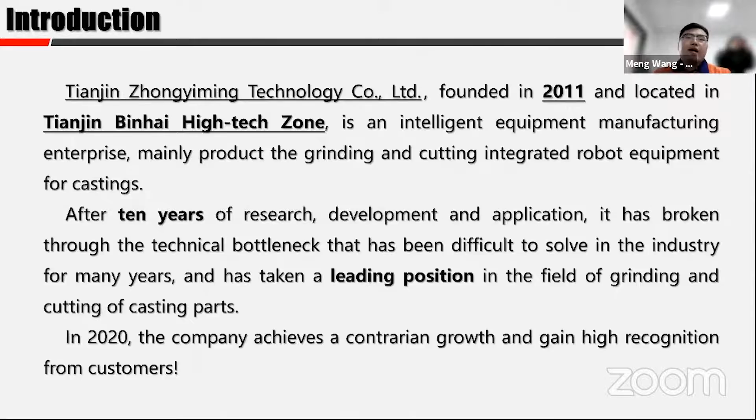I'm a mechanical engineer, mainly engaged in mechanism synthesis and industrial robot design. Okay, let's get back to business. My presentation is composed of 5 parts. The first one is challenges.

Manufacturing is the foundation of a country, and the manufacture of parts directly determines the function and performance of the equipment. Casting, as one of the most important methods in manufacturing, accounts for more than 40%. With the development of automobiles, rails, wind power, and other fields, the size of castings has gradually increased, reaching several meters to tens of meters.

At the same time, due to the requirements of equipment performance, the materials of castings have also increased. Among them, the most typical are high hardness, high viscosity, high temperature resistance castings, such as high manganese steel, high chromium steel, high nickel steel, and so on. In a word, nowadays, castings are developing in the direction of multi-types, multiple materials, and multiple scales, and the machining difficulty is also increasing.

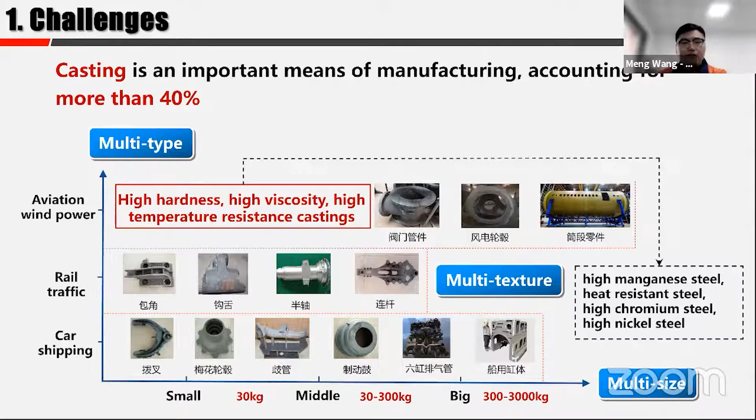As we know, the casting process generally has tens to hundreds of millimeter casting heads, mold closing lines, and other residual features. Their efficient removal is a key technology problem in casting parts manufacturing because it affects the production cycle to a large extent.

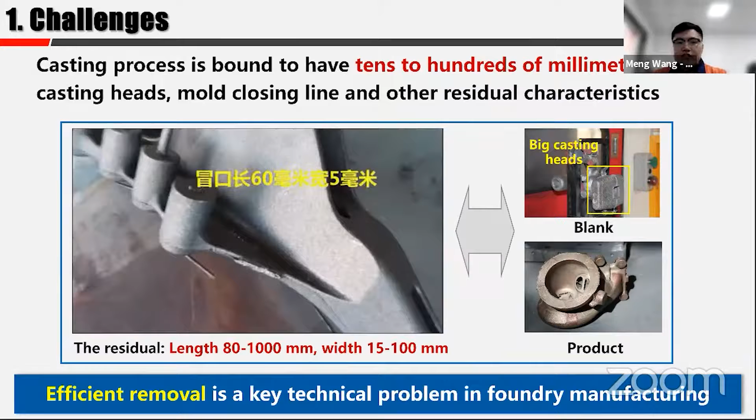Unfortunately, at present, more than 90% of enterprises use manual grinding methods, which is not only low efficiency, but also poor consistency and severe pollution. In contrast, the use of automation equipment or robots for casting machining is more efficient, green, and cost-effective. Therefore, the way that machines replace people must be the development trend of the future.

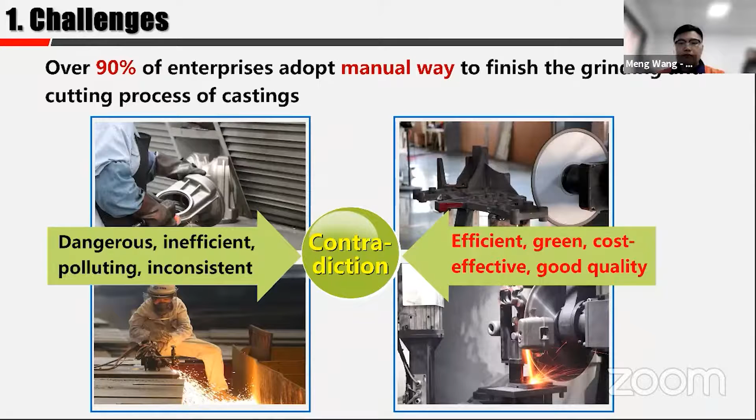Based on this, many countries around the world have carried out a lot of exploration and practice. The current solutions mainly fall into the following two categories. The first one is machine tool equipment, which is modified from traditional machine tools. It has high stiffness and precision, and could complete the grinding and cutting of large-size residual features. However, due to its poor flexibility, it can only complete machining in a small space and limited direction. Meanwhile, it is easily affected by serious dust during processing, so its maintenance cost is very high.

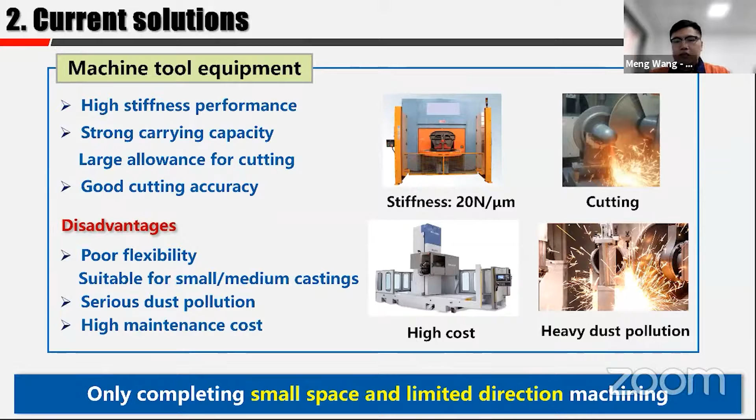The second type is serial robot equipment. Although it has high flexibility and low cost, because of its poor stiffness, it can only finish small residue and low efficiency grinding. Obviously, the above two types of equipment are not ideal choices in terms of cost performance and processing efficiency.

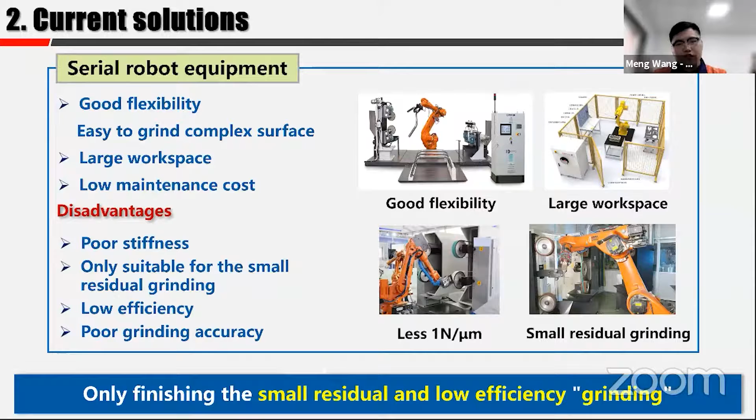For this situation, our company has given a brand new scheme. Our idea is to combine the high flexibility of serial robots and high stiffness of machine tools, adopting a new hybrid mechanism as a breakthrough point for innovation, and form a novel generation of grinding and cutting integrated robots with high stiffness. Furthermore, by studying performance design approaches and control technologies, we can make up for the existing deficiencies.

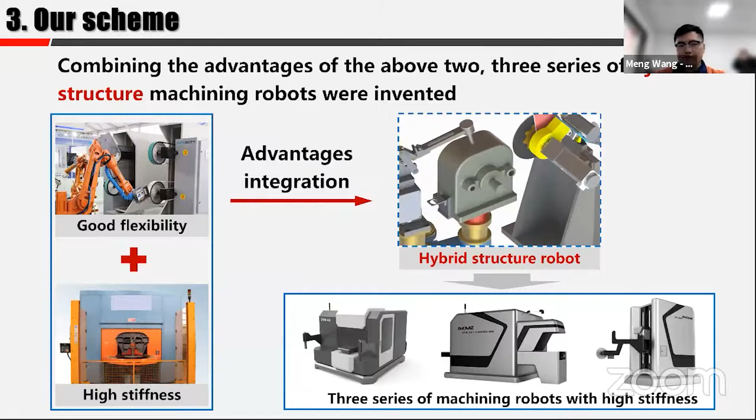Based on that, we invented 3 series of intelligent robot equipment. After that, integrating other auxiliary technologies such as force control, teleoperation, and feature detection, a total of 10 versions of robots and production lines have been developed to meet the machining demands of different castings.

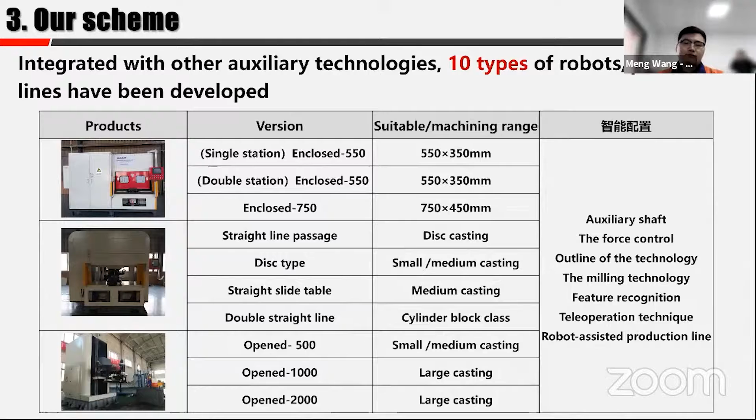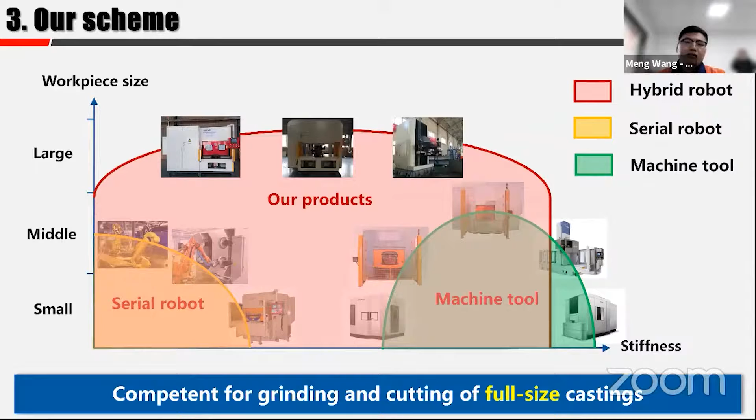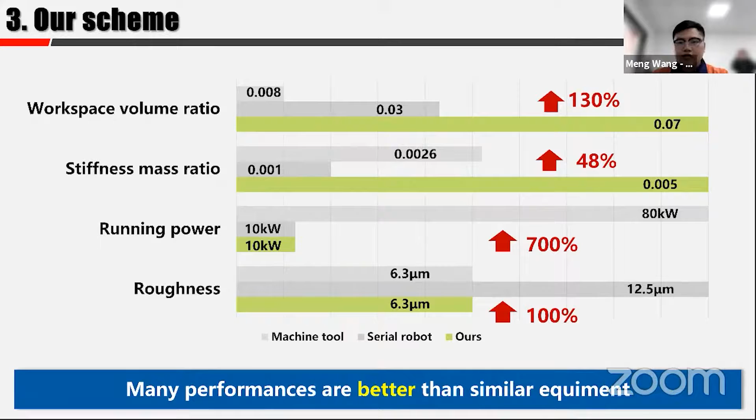In terms of applicability, our products have high rigidity and are suitable for grinding and cutting of full-size castings. To be more specific, the workspace volume ratio, stiffness mass ratio, running power, and machining quality are superior to other similar equipment.

In summary, due to using the novel hybrid structure, our robot has high stiffness, good flexibility performance, and can realize the integrated machining of grinding and cutting. Among them, there are 4 most important advantages: all residual features are removed at one time, small size and low energy consumption, saving space, time, workers, and expenses, and high comprehensive benefit ratio. Okay, that's all the introduction about our scheme.

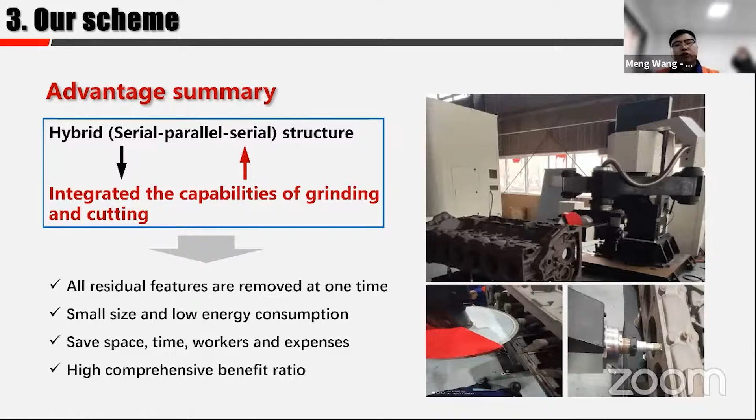The next part is applications. Since the establishment of our company, we have close to 30 customers and sold more than 150 sets of robots or production lines. From the sales network diagram, it's clear that our partners are basically in mainland China. However, we very much hope to enter the international market and cooperate with demanders in other countries.

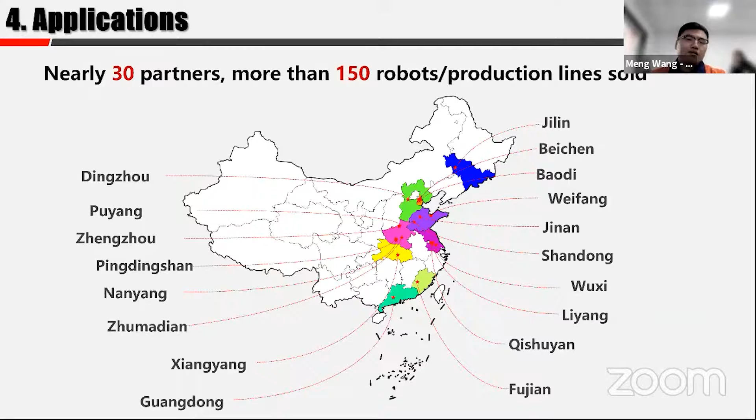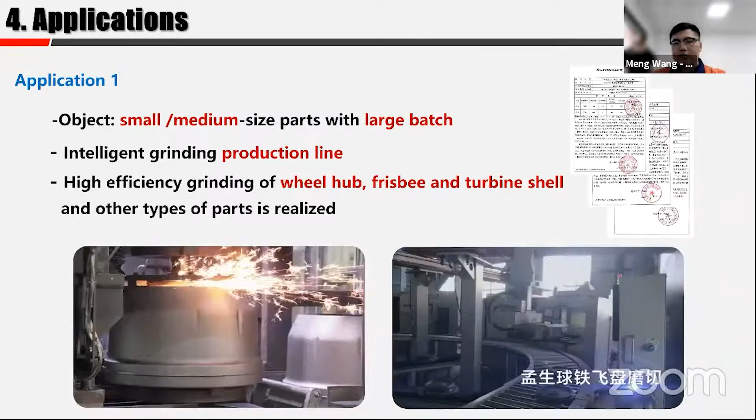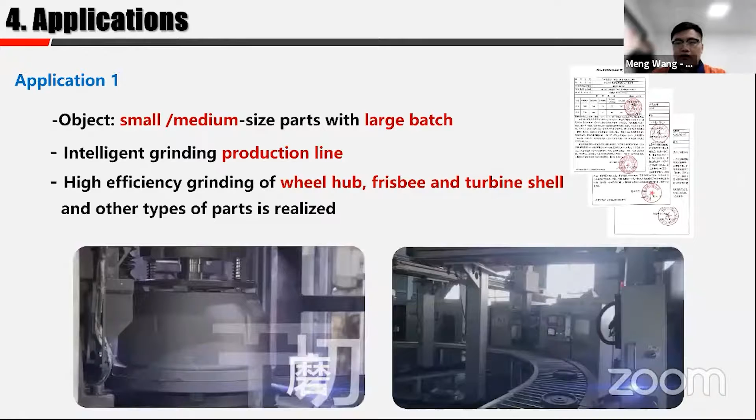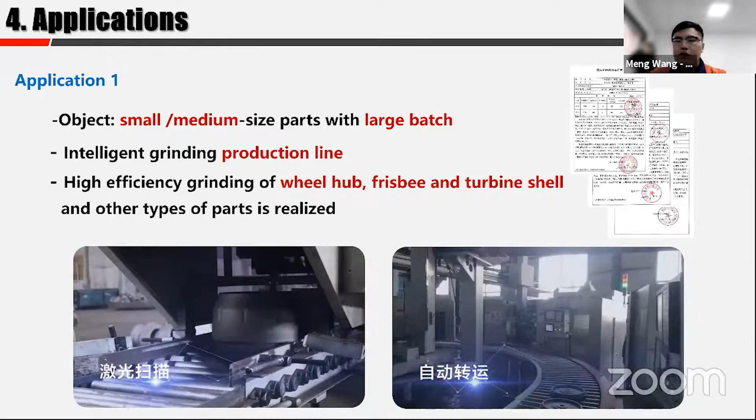According to characteristics of the objects, we divide all applications into three categories. The first object is small or medium-sized casts with large batch, such as wheel hub, frisbee, turbine shell, and other types. For that, we adopt the intelligent production line to solve the problem of high efficiency machining of such castings, which has been applied in many enterprises.

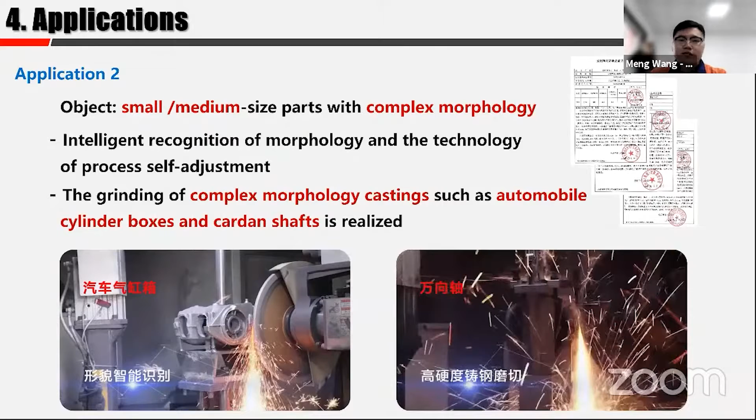The second type of object is small or medium-sized castings with complex shapes, mainly automobile cylinder boxes and cardan shafts. To deal with that, we draw on the method of intelligent recognition of morphology and the technology of process self-adjustment.

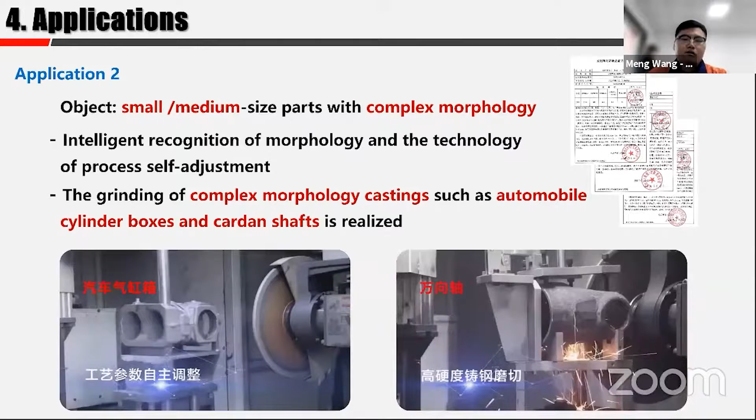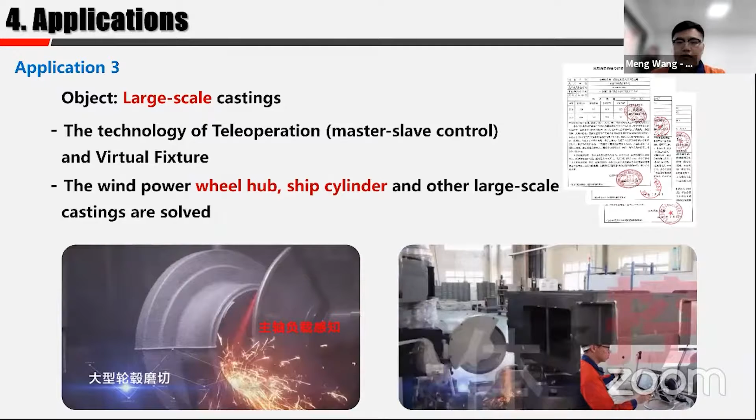The third category is the large-scale castings. Due to the small batch, large size, and random distribution of burrs, this type of part has always been a worldwide technology problem. The plan adopted by our company is to integrate teleoperation based on master-slave control, virtual fixture, and spindle load detection technologies to deal with that. As shown in the video above, we have carried out a lot of experiments, and the results show that the method is useful and the effect is very good.

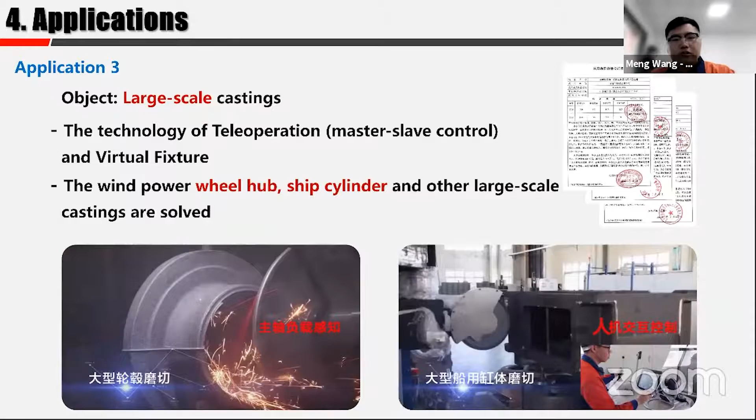In addition, an application requiring special introduction is the four-cylinder internal combustion engine. The cylinder block castings have large size, wide and thin casting heads, and complex holes and grooves, which leads to very difficult machining. To solve this problem, we divide the machining process into 6 steps. The opened 2000 high stiffness robots with 3 tools were used. Compared to the traditional processing method, the efficiency is increased by about 10 times.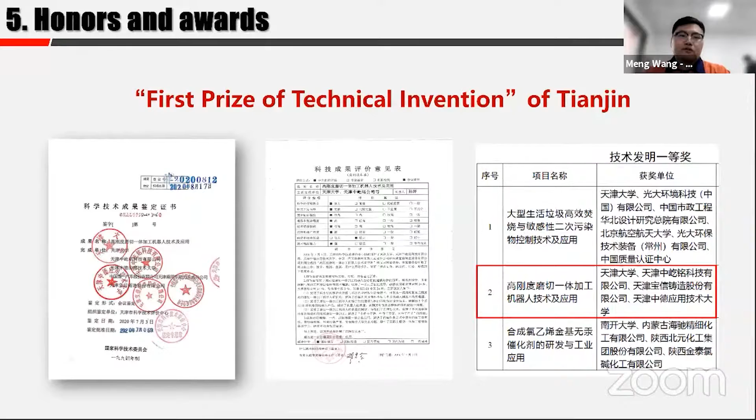In addition, we also won the Gold Award and China Good Design in 2020, and earned the Innovation Award of China Foundry Equipment for 2 years. Apart from the above honors, the company is recognized as the service provider of advanced casting technology and got the Innovation Award of Foundry Industry in 2020.

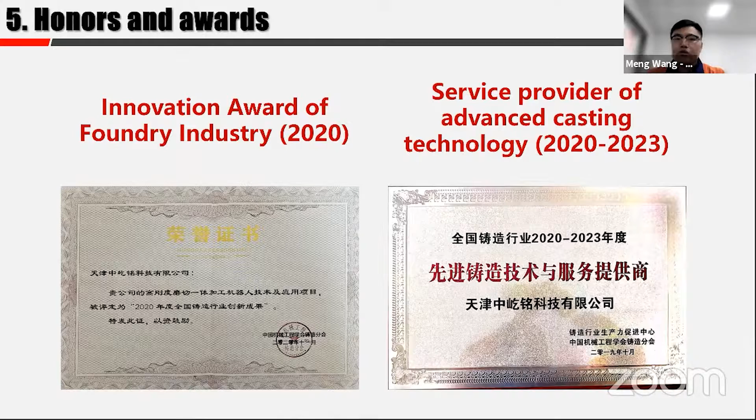In closing, I'd like you to watch several short videos. The first one is the welding experiments of the hook-tail frame.

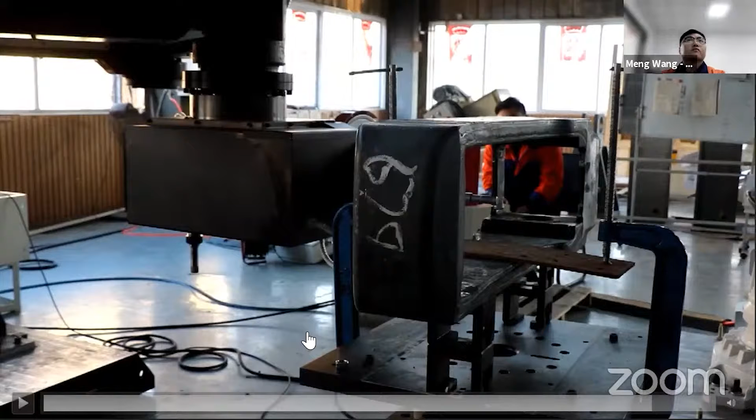Okay, the second one is a video of the crankshaft grinding.

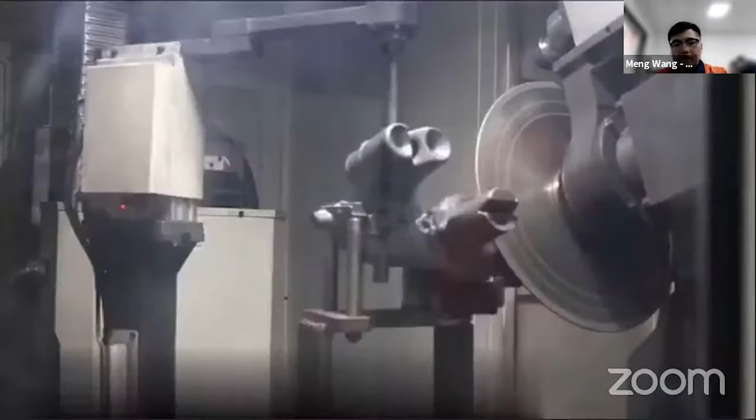Okay, the third one is the cutting of the big casting head.

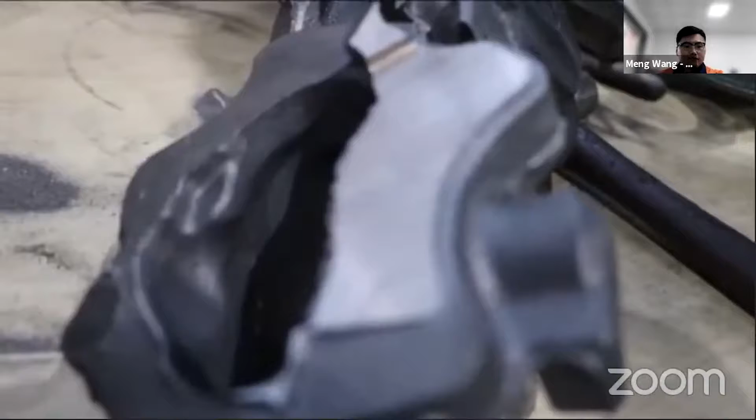Okay, the next one is the teleoperation for large-scale castings.